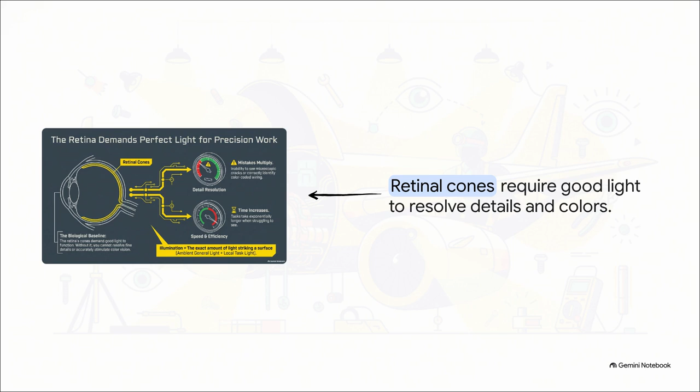Moving on to Section 2, the ambient light myth. General lighting is never enough. That biological limitation brings us to a massively dangerous misconception in our industry: the ambient light myth. Let's break down why ambient light basically always falls short. Think about a hangar. The ceilings are incredibly high, right? That means fixtures gather dust, which drastically dims them. Plus, burnt-out bulbs are super hard to reach, so they're rarely replaced right away.

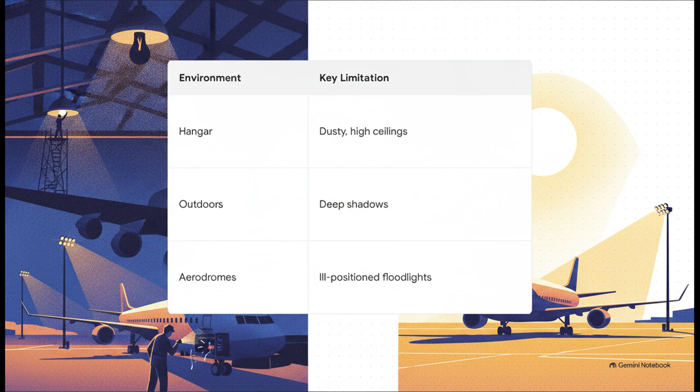What about outdoors in broad daylight? Well, there you're fighting deep, impenetrable shadows cast by the fuselage, and internal compartments are still completely pitch black. And at night, aerodrome floodlights might look bright, but they're designed for taxiing, not positioned to help you inspect a tiny fuse pin. So, the definitive verdict on ambient light: it is universally deficient for the precision work required in aviation. It's just a baseline. It is almost never sufficient on its own, which means you have to actively supplement it.

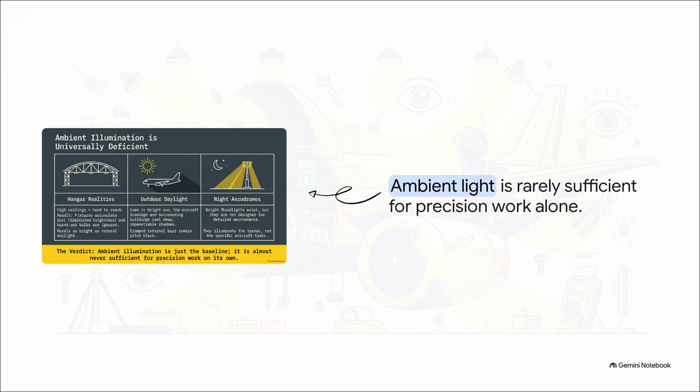That takes us to Section 3, mastering local task lighting, defeating shadows. To actually defeat those shadows, local task lighting is your ultimate precision instrument. And there are a few mandatory best practices here. First off, you, the engineer doing the work, are the ultimate judge of exactly how bright that light needs to be. Second, always default to hands-free lighting whenever you possibly can. And third, you have to actively direct light into shadowed areas. For example, pointing lights upward from the base of a scaffold to clearly see the underside of a wing.

Now, we absolutely can't talk about task lighting without acknowledging an undeniable truth of aviation maintenance. Murphy's Law absolutely guarantees your batteries are going to die at the exact moment you are furthest away from the parts store. Never, ever take a chance and try to finish a job in the dark just to save yourself a walk. Always carry spare batteries. Period. To maintain safety standards, you really need to deploy your local task arsenal effectively.

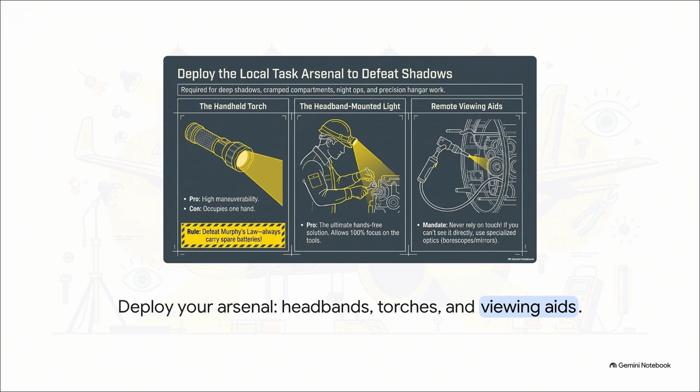A high-quality torch is fantastic for maneuverability, but it completely occupies one of your hands. Headband-mounted lights, those are a real game changer. They're the ultimate hands-free solution, letting you focus 100% on your tools. And for those deep, inaccessible spots, you've got to rely on remote viewing aids like mirrors and borescopes.

Let's look at Section 4, glare and ergonomic hazards, the invisible distractions. Now, what's really interesting about this is that adding a bright light introduces totally new hidden hazards. Understanding how glare acts as a severe cognitive distraction is absolutely key. You've got direct glare, which happens when a task light is placed straight into your line of sight. It's literally blinding. But indirect glare is just as dangerous.

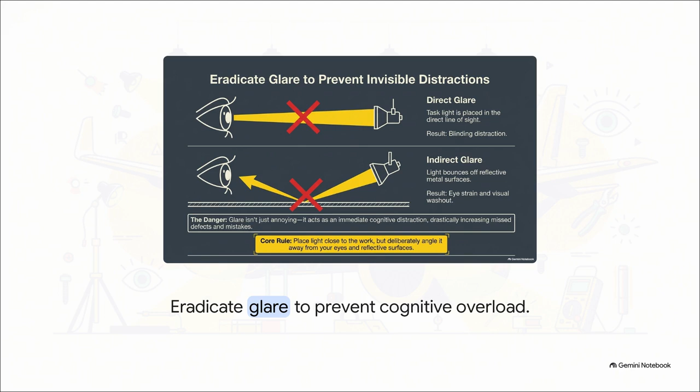That's when light fiercely bounces off highly reflective metal surfaces right back into your eyes, and that causes severe visual washout and fatigue. Both types of glare drastically increase the chance that you're going to miss a critical defect. So the core rule to eradicate this is simple, but absolutely crucial. Always place your task light close to the work, but deliberately angle the beam away from your eyes and away from any reflective surfaces.

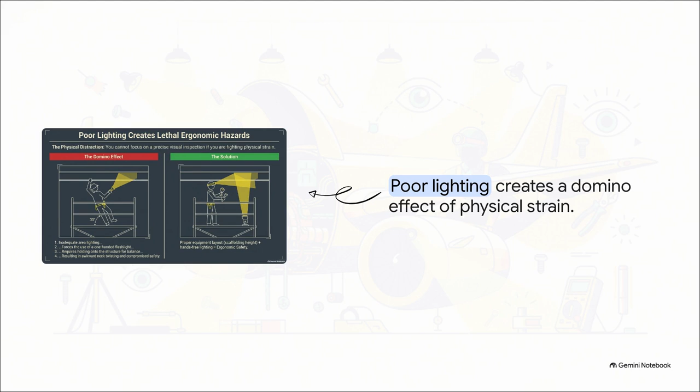Because if you don't control the light, you can actually trigger a lethal domino effect of physical strain. Just look at how poor lighting creates a total ergonomic nightmare. If ambient light is terrible, you're forced to use a one-handed flashlight, right? That means you've got to hold onto the scaffolding for balance with your other hand, which leads to awkward neck twisting, muscle fatigue, the whole shebang. You simply cannot focus on a precise visual inspection if your brain is simultaneously fighting physical strain.

This brings us to Section 5. The danger of blind touch. Never guess in the dark. So, this physical strain isn't just a problem when you're up on scaffolding. It highlights a massively critical safety hazard in ancillary spaces, too. Safety doesn't just stop at the hangar door. It absolutely extends to offices and stores.

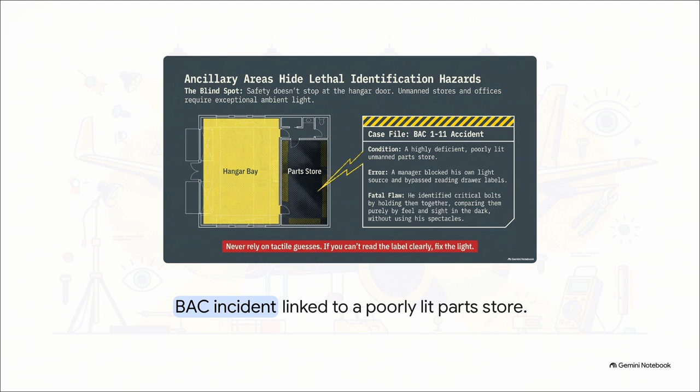During the investigation of a major BAC 1-11 accident, they discovered that an unmanned parts store was so poorly lit, a shift maintenance manager literally had to block his own light source just to access the drawers. Unable to see clearly, he completely bypassed reading the labels. He ended up identifying critical bolts purely by holding them together, comparing them by feel and sight in the dark, without even putting on his glasses.

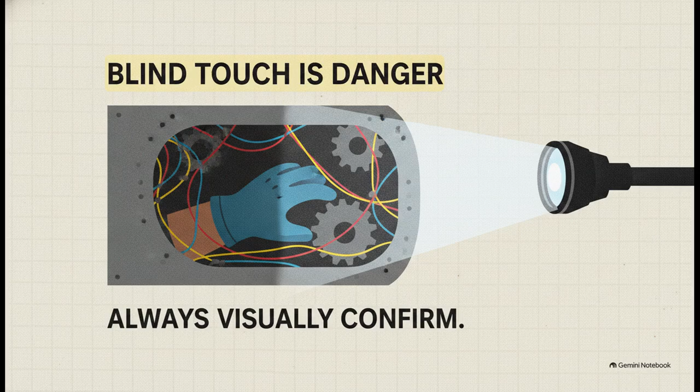And that simple environmental failure contributed directly to a major incident, which gives us our absolute golden rule for cramped compartments and dark stores alike. Relying on touch is never a substitute for visual confirmation. If you cannot see it directly with your own eyes, you must fix the light or use specialized optics. You just never guess. Let's move to our final section and see how this all builds up.

Section 6. Case Study. Northwest Airlines Accident in Tokyo, 1994. When seemingly small failures in ambient light, task lighting, and ergonomics combine, the results can be catastrophic. The NTSB investigation of the 1994 Tokyo accident revealed a totally horrifying sequence of compounding errors during an OK-to-close inspection of a pylon area. First, the scaffolding was placed way too close to the wing, completely ruining physical access. Second, there was zero dedicated lighting pointing upward into the pylon base. And third, the portable fluorescent lights they did have were covered in paint overspray residue which severely dimmed them.

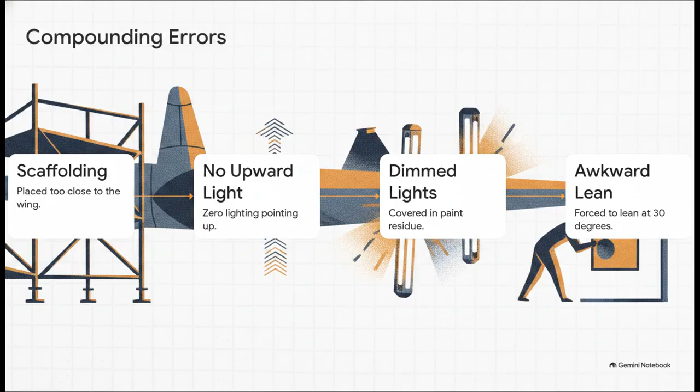And this brilliantly illustrates the ultimate inspection failure. Because of the terrible setup and the contaminated gear, the inspector was forced to hold onto the airplane structure with one hand, awkwardly point a flashlight with the other, lean at a severe 30-degree angle, and twist his neck just to see anything at all. The environment made a safe, secure visual inspection physically and visually impossible.

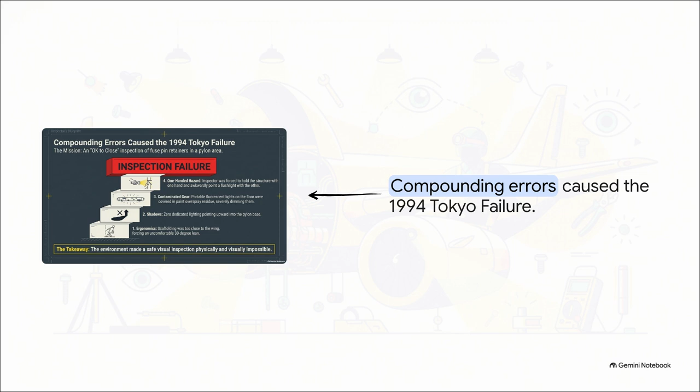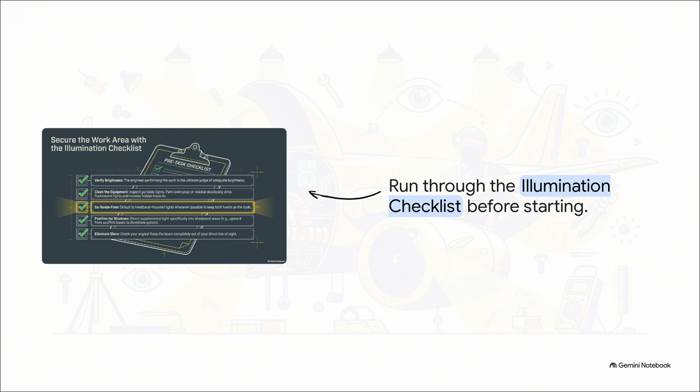To make absolutely sure you never find yourself in that position, you have to control your environment before you ever pick up a wrench. Run through this pre-task illumination checklist. Verify the brightness is sufficient for your eyes. Clean your equipment. Seriously, check for paint residue. Default to hands-free lighting. Position your light specifically to defeat shadows. And check your angles to eliminate glare.

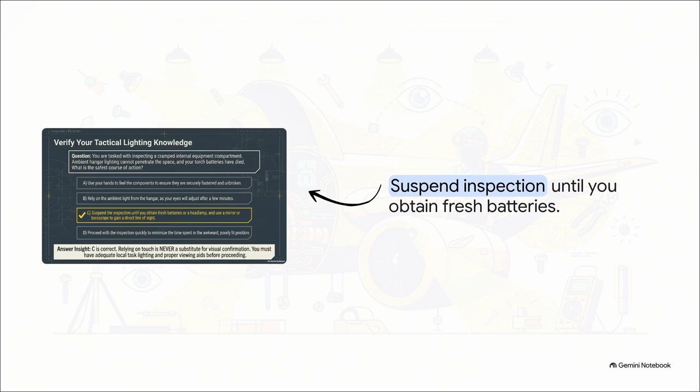Okay, let's verify this tactical knowledge with a quick scenario. Imagine you're deep inside a cramped, dark equipment compartment, and suddenly your torch batteries die. Do you just use your hands to feel if the components are secure? No way. The only correct safe action is to immediately suspend the inspection. You step away, you obtain fresh batteries or a headlamp, and you use a borescope if necessary to regain a direct line of sight. So what does this all mean for us?

We've covered the biology of your eyes, the reality of shadows, and the life-saving necessity of tactical lighting. As we wrap up this explainer, I want to leave you with one final thought. Next time you walk onto the hangar floor, take a really hard look at the shadows. Ask yourself, is your current lighting setup hiding a critical defect in plain sight?